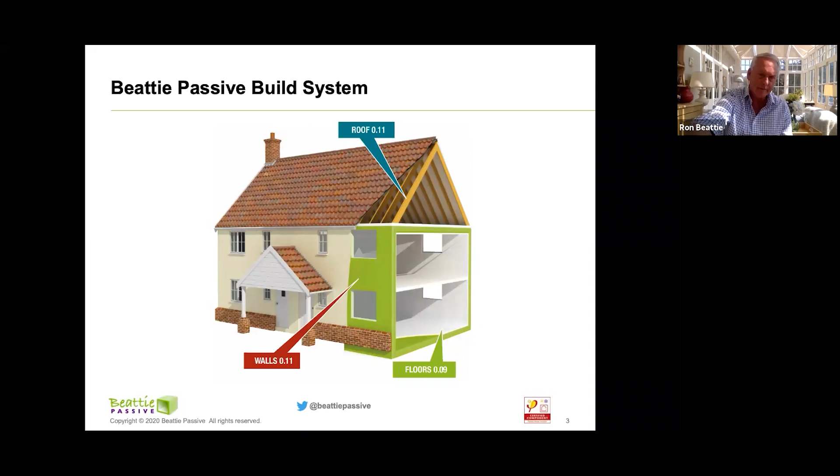Passivhaus, as I say, was coming really into my view. And I don't know how many people here I'm talking to are converted to Passivhaus. If you want to put your little flag up and tell me, that would be great, so I know how much detail I need to go into.

But Passivhaus was invented some 30 years ago by Wolfgang Feist, a building physics doctorate who basically wanted to find a way of insulating his own home which meant he didn't need heating. And there are five basic principles.

You can do it any way. It doesn't have to be timber frame. It doesn't have to be Beattie Passive. You can do it using straw. You can do it using brickwork. It's just that these techniques haven't been designed to deliver it.

And what I wanted to do was deliver a system that will give you it by default. It doesn't matter what shape of building or how you're building. If you're building Beattie Passive, you will achieve the Beattie Passive standard and the Passive standard. So the five main processes are

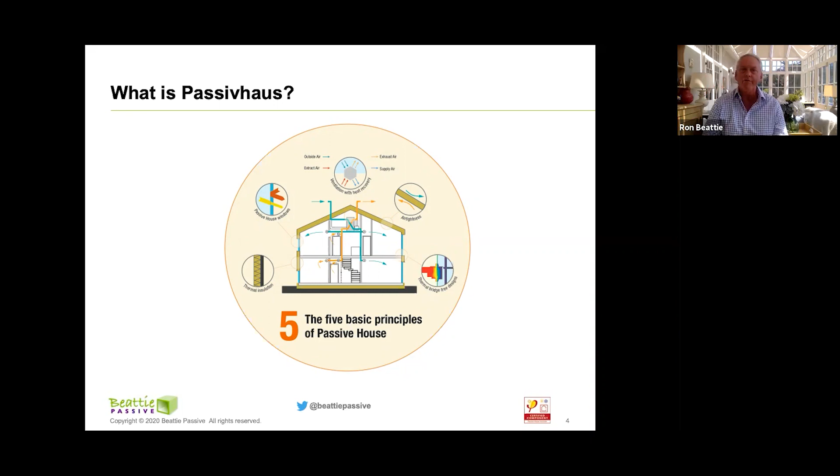complete insulation, so an insulation that goes from the floor around the walls and across the roof or ceiling. And of course, in Beattie Passive, with its void, it does that every time, no problem at all. We've then got really good triple glazed windows, because it's great having a good wall, but if you haven't got good windows, then that's also going to be an issue for you.

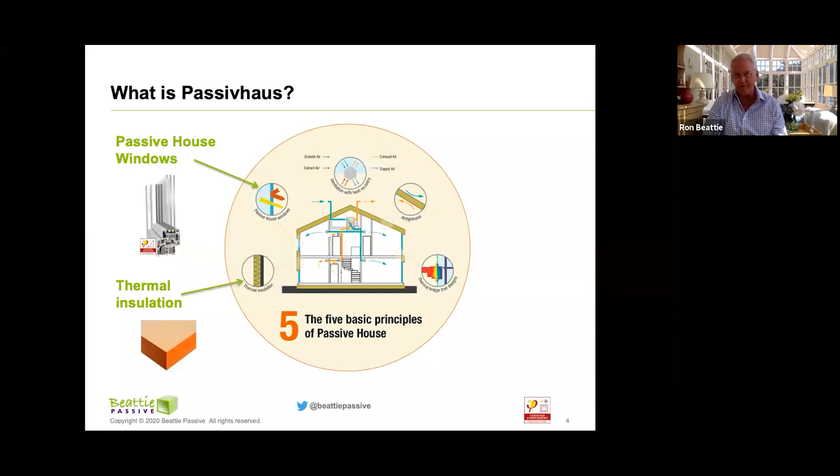So triple glazed windows, argon filled, 0.78 U value and below. So very good windows. Heat recovery ventilation, a very, very important part. Now, just let me go into that a little bit more. In our own homes at the moment, if we put our central heating on, we've probably got a trickle vent above our windows. We've probably got gaps all over our houses.

We also go into our bathrooms and our kitchens and we put our fans and extractors on. And what happens then is we just exhaust all the energy that we've already created in those rooms. So with heat recovery ventilation, you're going to actually recover 80% plus of the energy that you've already created. That means that when we're using our toilets and our kitchens, that energy isn't going straight outside. It's extracting from those areas, but we're recovering the energy and putting it back across the cooler air that is coming in from the outside. So a very simple machine, but a massive reduction in the amount of energy that we need.

We then look at air tightness. Air tightness in a passive house is below 0.6, where in the building regs it's 5, or in some places it's 10. That means that the air is going to keep going out of the building constantly. And all we're doing is using our central heating to heat the air that is going out, to heat the air again that is going out, and we've got no reuse of that at all. And unless we get a building below 0.6, we're not going to get to that passive house reuse of that energy all the time. And in fact, MVHR won't work at anything above 3, where it's really not useful at all.

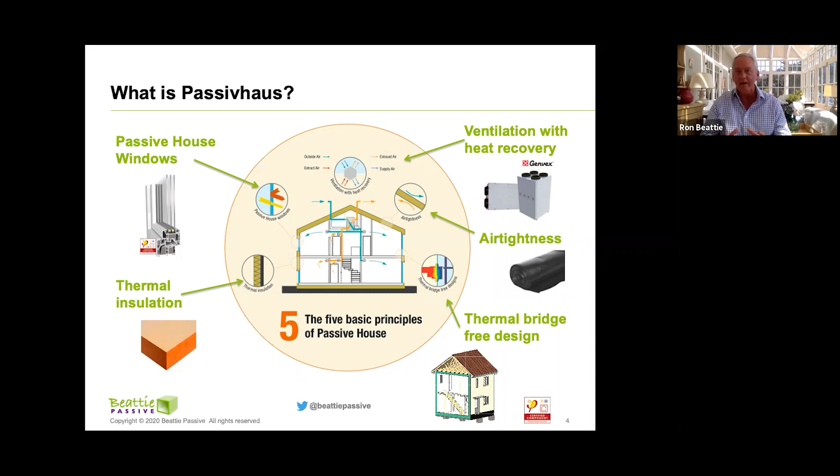Thermal bridges is another really important one. In Beattie Passive, that continuous void around always delivers a Y value, which is the thermal coupling between the two, outside and inside, and it's thermal bridge free. So we get to that passive house standard really easily. So building the new stock of passive houses that need to be built to save on energy is going to become very simple using the Beattie Passive system for all of you.

The benefits of that are basically the energy performance, of course. So you're reducing the energy use of that building right down. So we're really cutting the amount of energy you need. But the biggest thing that's going to come forward is the enhanced comfort levels and the health benefits of living in passive houses. You don't dust anymore. The air is being transferred and filtered through the system in the MVHR. So you're not getting the build-up of dust. You don't get pollen. If you've got a cold, or these viruses are around, and you're extracting that air all the time, then it will reduce the amount of infections.

And certainly across the world now, a lot of hospitals and kindergartens and that sort of thing are being built to passive house because of the benefits. So we're going to see a big change in time. We're going to see it going from the benefits of energy to the benefits of health, which is massive.

And then, of course, we've got the zero carbon agenda. For all of us now, I think climate change has been brought to the forefront. I think this virus that we're going through at the moment will make us think that we've got to come out of this and invest in the built environment, and make sure that we're not going to have the issues we've had this last summer and this winter with flooding and fires and all the other things that are going on.

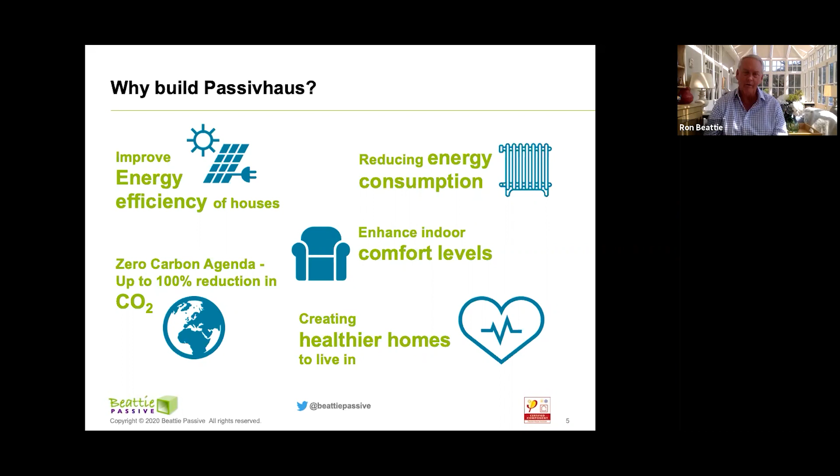So the benefits of Passive House, I think, are absolutely massive. But Beattie Passive has got many other agendas. And I'm going to go through now some of them, but there is more. These are the key ones that I wanted to address.

And I think one of the biggest problems we're going to have is the skill shortage in the building sector. We lose 400,000 people a year going out of the build sector, and we're not bringing anything like that in. And we're going to see a massive shortage of skilled workers going forward. So we've got to have new systems coming forward that are going to be semi-skilled. They're going to allow the young people of today to get back into building.

I mean, I was lucky. I went from cleaning toilets, if you like, onto sites and working. Fantastic. And I know that we've got a whole generation of youngsters that job would be perfect for. So we've got to have a system that allows us to deliver it in all different ways. And we can do that with the Beattie Passive system.

What we did was we decided to do it as a stick build, and that was the way that we started it. We then went on to a panel build, and now we're going on to off-site manufacture. So once you've done one of those systems, you understand the complete build system. There's only 13 components and they go together the same way. The building system itself can be built in any shape or size. So there's not a house yet come to me that we haven't been able to design and build.

And because it's so simple with those 13 components all going the same way, it's really simple for people to get to grips with it. And we've got our own training academy where people can come and learn to build the Beattie Passive system. The biggest part, and this is the absolutely biggest part of anything we ever do, is we need to guarantee performance. We need to test every building because we've got to guarantee that what we're doing has been done.

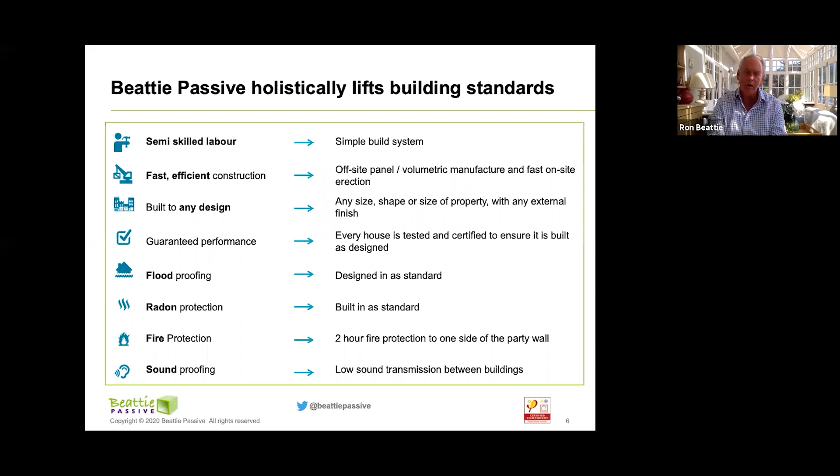Our buildings are designed to fail as well. What is the point of having a building that when it gets soaking wet, all the insulation sags and starts to rot? So I designed Beattie Passive so every bit of moisture that gets into the building finds its way to a ventilated floor, and at the bottom of that floor it dissipates. I expect Beattie Passive buildings to be filled with water at some point in their life, because that's what happens to buildings. Also in fire.

Why do we build timber frames that burn down? So I decided that when we build our side of the wall, we're not going to have an hour fire rating, all our walls are going to be 2-hour fire. So every wall of the house is 2-hour. And when you have a party wall, you have a gap, and then another 2-hour wall. So we're getting near 4 hours of fire protection from a fire starting in one house to going through to the next. Then that included sound.

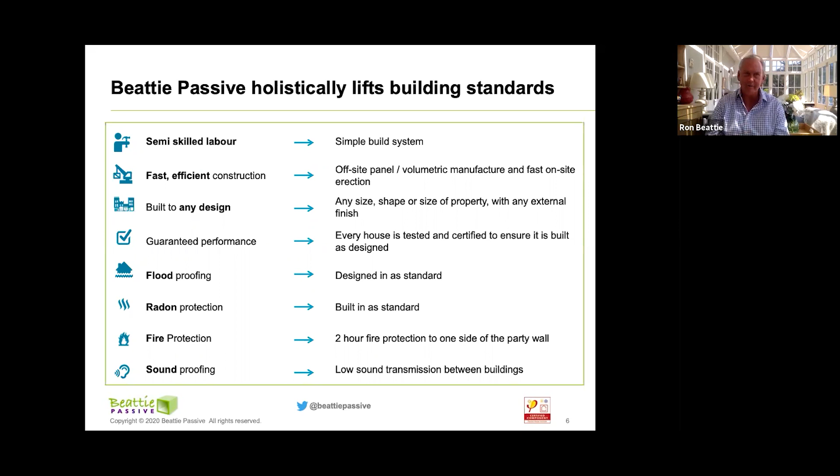I always remember building some terraced houses, and I was in one of them one day and heard someone going upstairs with a radio on, and I could hear near enough everything. These were built to so-called robust standards. I decided that was never going to be good enough. So our sound is between 52 and 57 dB, that's up to 6 times better than building regulations. A massive improvement. And again, we test every single house, so we know every single house has been built correctly because we've done a sound test in every one. It's a wonderful understanding, it really is.

Inspection, as I talked about in testing, is a very important part of it. So a Beattie Passive independent engineer or surveyor will come around to every build and look at that building. Because the building structure is open when it's structurally complete, he can put his head in the walls, in the floor, in the roof, in the ceiling, and see every single structural joint. At the moment, when an inspector turns up on site, you can't see much because he's looking at your day's work. But in a Beattie Passive home, it's completely open, and he can say, yes, that's built correctly. What we're doing is reducing risk. Reduce risk, we cut cost. And isn't it lovely to know you can always do that at every single Beattie Passive home?

All the materials are A-rated, they're all in the BRE Green Guide, all chosen because they'll work with the other materials around them. As I said before, they're chosen because they don't suffer when moisture gets into them. Our insulation is designed so moisture will only fall through it, not go across, so you can tip water and water and water into it and nothing will happen, it will find its way to the void and dissipate. There's no wastage. We do everything in BIM, we 3D model the building, and we can tell you exactly how much material goes into that building. That's a massive cut down of waste and cost as well, which is very important.

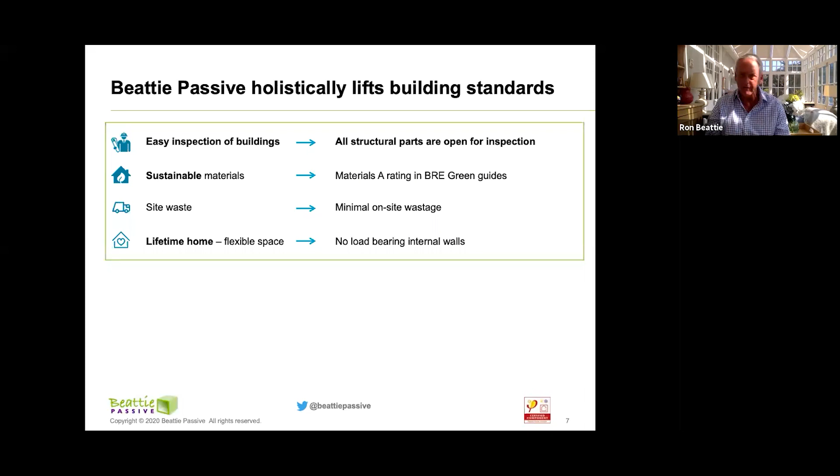One of the other things is about lifetime homes and flexibility. I've never liked buildings to be static. I believe every building should change and alter over its lifetime, as the residents and owners want to do so. Most of us live in homes that have changed over the years, but it's been very difficult to do so - knocking down walls, putting in lintels, we can't move walls, we put new foundations in. So every Beattie Passive home is designed with a minimum amount of internal walls, and there's a service void that goes continually around the building. So every single bit of that building can be opened up and you can get to the services and move them around. A very simple process, a very simple build system.

Our U-values start at 0.11, and for our walls, roof and floor, 0.09, and go down from there. Our air tightness is 0.6, our Y-values are 0.039 and below. Our sound is up to 57 dB and our fire resistance is 2 hours. This is standard - we do nothing worse than that, ever. What we do is get better. And I've just finished a house with a wall U-value of 0.075, which is incredibly insulated.

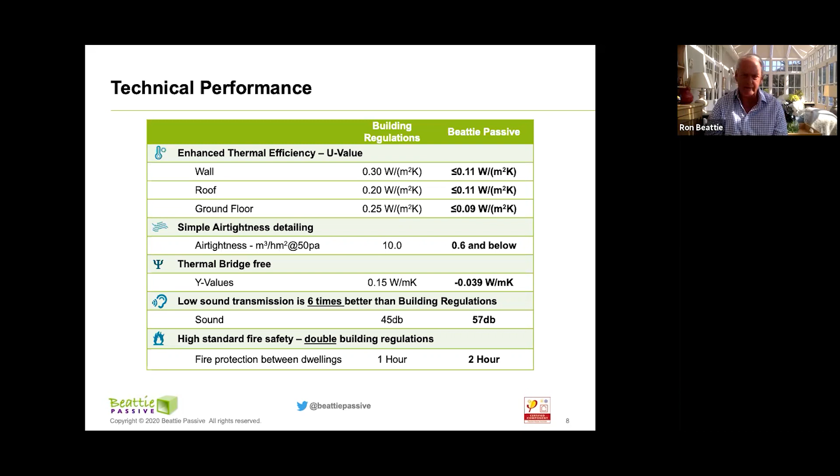When I first designed the system, I was lucky enough to be able to patent it. And that's really important because we can control the quality of Beattie Passive. I don't know of many other building systems around the world that can say that. Certainly we are the only company in the UK that's certified by the Institute in Germany, and that gives us a real stamp of quality from the Institute. We're now patented in 42 countries with 97 patents, and Beattie Passive is growing because of that. So that's really exciting.

And that one got hit with lightning just as we handed it over to the client. He took possession of it, was laying his lovely green carpets, and then I got a phone call saying, 'Ron, my house is on fire.' I could hear him shouting down the phone. It was about 4 o'clock in the morning. I didn't wake up and answer my mobile till just gone 6. I jumped in the car and got down there - it must have been about 8 o'clock.

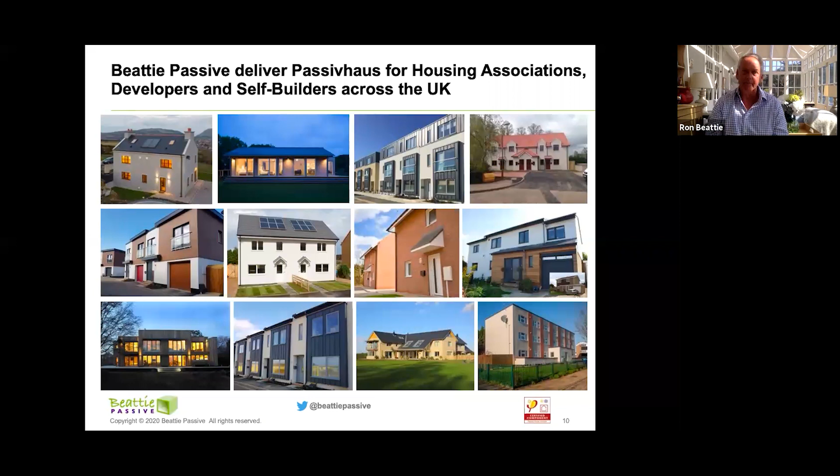So what products has Beattie Passive got? Some of the seminars we'll be doing from now on will go into these in more detail, but basically we've got our on-site delivery, where we can actually produce Beattie Passive and then go and erect it throughout the country.

We've also got our flying factories and flying factory partners, and this is really exciting because what we're doing is sharing the Beattie Passive system with many partners across the UK, so they can actually build with it, get the benefits, get the cost reductions, and make the profits.

And where we are, we're the design and test company. So we're the intel inside those buildings. And we will learn and we will gain and we will pass that family of goodness around.

That's what we hope to do. We are now moving into volumetric, and I'm very pleased to announce that very soon we'll be opening our first full volumetric factory. Our partners and partnerships around the UK will grow with that. That's looking at a next generation of zero carbon homes, built with young people and working with ex-prisoners, regenerating areas where factories need to be. So that's an exciting thing.

We've also got our House 4 range, and that's looking at homelessness and that type of product that is very popular at the moment, and that's going out.

And then we've got our retrofit. We've got these seminars, so I won't be saying much, but retrofit is such a massive opportunity. We need to be retrofitting a property every 2 seconds, really, to catch up with our 2050 populations, and we've not even started. So that one needs to move on, and in the seminars later on we'll be going into a lot more depth, so please join if you're interested in retrofit.

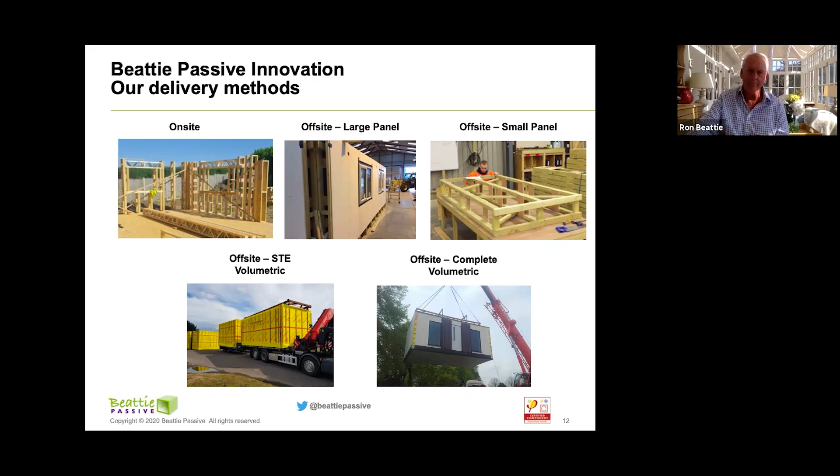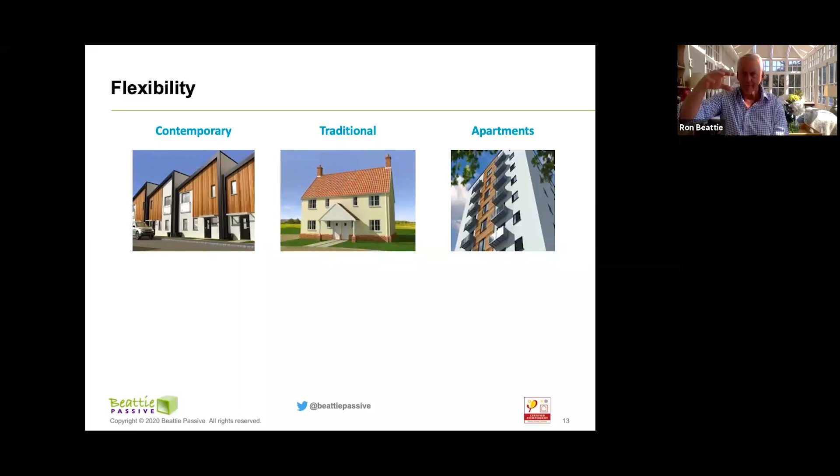So when I talk about it being the same box, I feel there's a bit of understanding needed here, because all houses are basically the same frame, the same brickwork or timber frame. But if we take the external of that building and say we're going to make it look modern, or traditional, or put up a block of flats - Beattie Passive, it's the same box.

So we've got the same box in a contemporary version, but slightly offset. Then we're going to clad it in render, and put a roof with a slope going down one side. And then we've got a traditional one with traditional clay tile, render, and a brick skirt. Same building, same size, same everything, but look at the difference in how they look.

And then we're going to put one on top of each other. That's going to be completely sealed for insulation, completely sealed for fire, and even completely sealed when Mrs. Jones has a bath and the phone rings and the bath floods and that all goes down 4 floors and floods everybody else. Why do we do that?

Why don't we have a completely flood barrier? So when that does happen, there's a couple of overflows and it goes out. The insurance company would save a fortune. But we don't do it. So every Beattie Passive home thinks about what if.

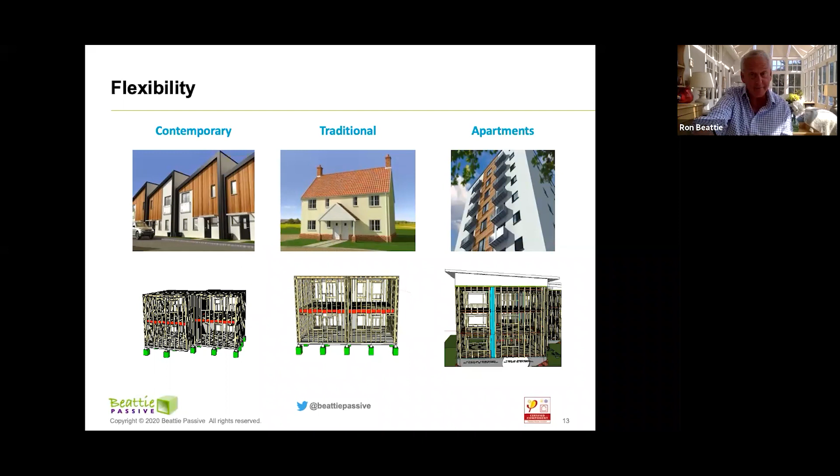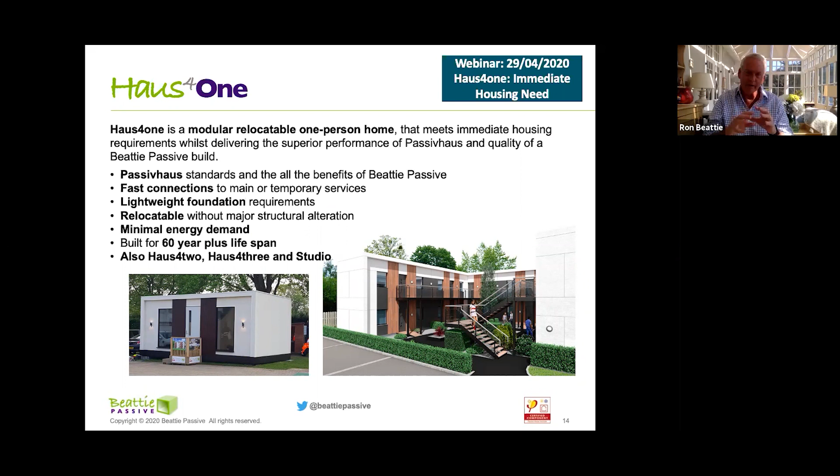That's the key to it, because there always is an if. Right, our Haus4one, as I say, we've got a seminar coming up on the 29th, it says there. Again, for the homeless, but built exactly the same way. And we'll be going into more of that at that time.

Our flying factories, again, on the 15th, which is the next one. And that's going into partnerships. That's going into how we work together. How can we bring your organisation to really understand the benefits of Beattie Passive and the costs that are really associated around that. So that's an exciting one for you.

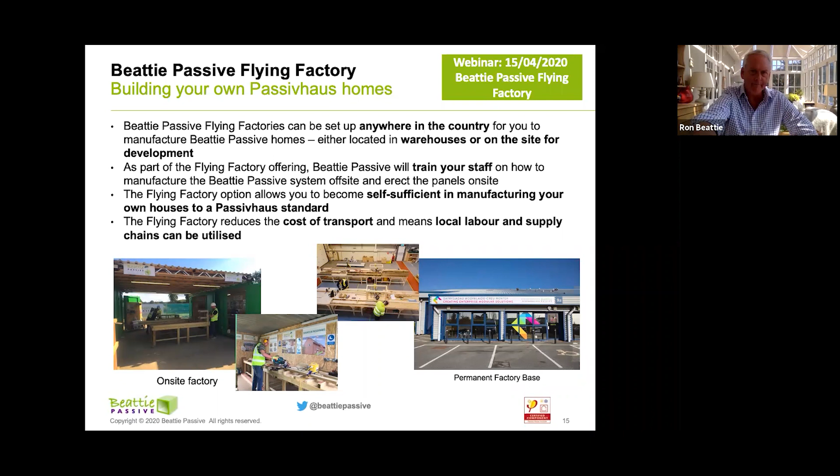And then we've got our retrofit. As I said before, massive opportunity across the UK. I know Wales at the moment, the Welsh government are really pushing it hard. We're going to see climate change. We've got such a massive housing stock in poor condition.

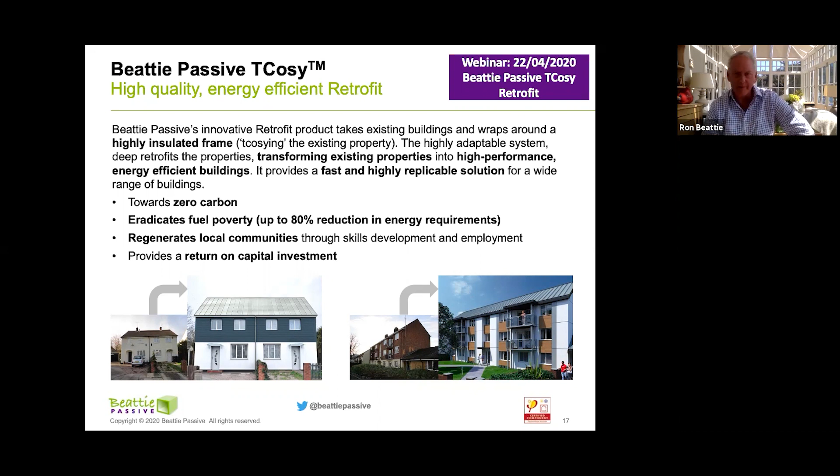The one on the right there is a block of flats we were working on before the shutdown at Great Yarmouth, where we're going to be reducing the energy by 80%. And some massive changes in the way people live in there as well. So look out for that one if you've got time.

And then we've got our training academy. And it's really important to understand everyone can build Beattie Passive. We've got people that have never built a house before building their own homes, knowing that they're going to build it correctly, knowing that it's going to reach that standard. And having fun doing it as well.

So if you're thinking of building your own home or being part of it, our training courses are run throughout the year, and they're really worth having a week or 2 weeks training. It's an insight into a very, very simple but effective build system.

Young people, as I say, we've got a whole amount of trouble coming without getting more young people back in the industry. So Beattie Passive can work with colleges, it works with prisoners. We're working with prisoners at the moment in Wales and in Thetford. And we need to stop spending the £15 billion a year recycling prisoners and the pain and trouble that we go to. And we need to give them careers.

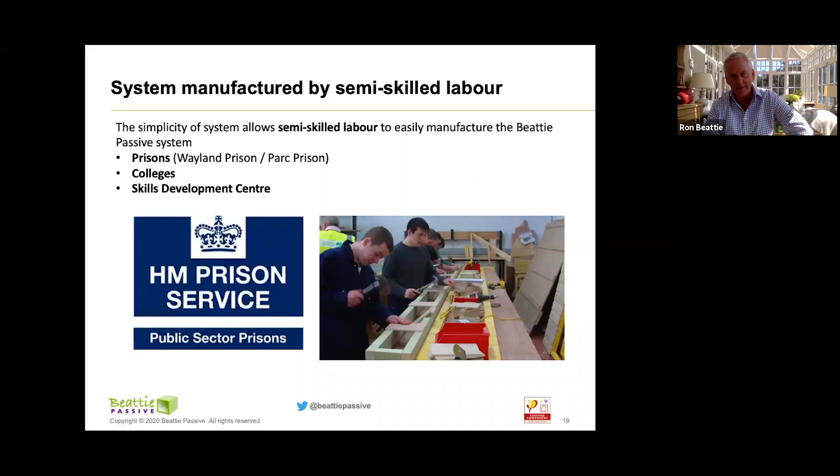Every prison in the UK can actually spend time building homes now instead of silly little jobs that they're doing. I mean, it's crazy. So we've got a big program in front of us to do that.

So the system, I'm coming near enough to the end of it now, so I hope I'm not boring you too much, but we take your drawings, we then put it into Revit, and once we're into that design model, we can then blow it apart in any which way that suits the job or the client. So stick built, panel built, volumetric or modular. And then we get a cutting list with all of the drawings done.

And that 3D model is really important because that 3D model is with you forever. That 3D model goes to your site. That 3D model can be on your iPhone or your iPad. So before you go out, you can actually look at every single detail you're going to build and then build it that way. You can stand back at the end of the day and say, crikey, I built that bit. It looks like that. Everything's been pre-made and pre-done with a simple numbering system.

And so it's a Lego. We talk about the IKEA furniture. It's probably easier, to be honest with you. You know, we don't mind if you've got a few screws left over.

As far as putting the building together is concerned, we put it together with a big Tek screw. And the reason we use a Tek screw, it's got a big hexagon head on the end of it. And there's nothing worse than putting something in the wrong position and realizing it and trying to get it out, and you take the top of the screw off. Whereas if you can use the hexagon end, pull it out, adjust and put it back again.

They're phenomenal screws. They take about 3 tons of shear on them, and the whole building is joined together with them. But they're also totally reusable buildings. So I believe that every building should have that end of life use. So our buildings are built for hundreds of years, and they will be around for hundreds of years. But if someone wants to take one down and reuse it, we can do.

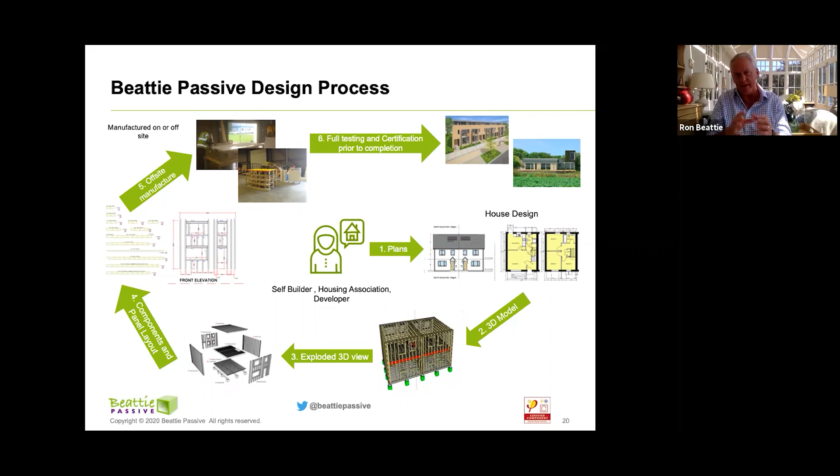One of the things on one of our early retrofits was we built our first test building. We got all our testing information and building regulations and things. And then we took that building down and we made a large extension out of it. It went for one of our first retrofits and we put it all back again, even the screws and insulation, everything. So all our buildings are totally reusable. So every building has got the same process, but it's designed so that it's flexible and easily moved around.

Right, I'm pleased we've reached the end of that. I'm hoping I haven't bored you. So if there are any questions, Isabel's going to be beside me here, and I'll try to make it 10 minutes or so of questions if there are any from anyone here today.

Yeah, okay, thank you for that, Ron. So the first question is from Peter Collins, who is living in one of our properties at Graven Hill. He said, why are none of the big builders building Passivhaus, and where do you see the industry going in the next few years? Okay, right, it's change. It's basically change and cost. I spent a lot of time with Barratt's, with a few of the other ones, Redrow. Recently, we've had all the drawings come over from Bovis and Galliford Try to say, can you price up their jobs? So things are changing.

And I think the biggest thing about this is that the customer, you're changing. You're saying to yourself, why am I spending money on the gas and electricity and heating when I can live in a passive home? So we're seeing a massive change in the industry. And also, of course, we've got climate change. So we are seeing this change from the builders that really will matter. But also we're seeing costs level out. And I think this is massive.

We're just doing an exercise where we're looking at the cost of Beattie Passive and the cost of traditional build. It had always been a little bit higher. It had always been, how can I put 300 millimetre of insulation into a wall, which I normally just have 70? How can I put triple glazed windows in when I don't do this? How can I have all that fire protection, all that sound protection, all that radon protection? How can I have all that for less money? What's happened is the traditional building has gone up. Beattie Passive has stayed pretty stagnant. We're using young people. We've got new people in the industry. So we're seeing a real level out in cost.